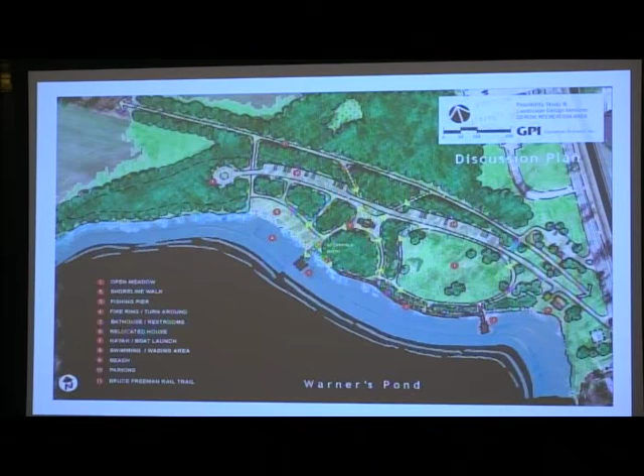Following the site walk, Ron Hedrick, who serves as our project manager and is also here this evening, showed a preliminary concept design illustrating how the park would build upon the current existing site features as well as handle some of the constraints. The majority of attendees provided comments and thoughts regarding programming, site amenities they'd like to see, and other questions related to the overall property.

So this evening we have our consultants from Greenman-Pedersen, GPI, who is the town's chosen engineering, design, and planning firm, with us to provide an update and show some updated designs that build off of this, but also build in some of the comments we received from the first meeting. I'd like the opportunity to reintroduce you to Ron Hedrick, our project manager, and Bonnie Ewing, the landscape designer, and Kristen Sabaski, the environmental sub-consultant from the ESS group, who is currently working with the town through the Natural Resources Division on the Warner's Pond assessment and dredging feasibility, but also is a sub-consultant of GPI for this particular project. I'd like to welcome Ron up to go over some new developments.

Well, good evening, everyone. Hopefully, if it's not a spoiler alert, maybe somebody will give us Red Sox updates throughout the evening. I know where they were when I looked last. I'm going to try to keep my presentation to about 15 or 20 minutes.

I've got about 30 slides to get through. But the first thing we want to start with is a little video clip we took. We had our drone pilot go out and fly a quick perspective from the water looking back. I thought it'd be an interesting thing for folks to see. If you were at the site walk, you know there's a lot of trees out there, different areas along the parcel. I'll get into that a little bit, how there's sort of segments that are different in character, but I wanted you to see it from the water and highlight some of the different areas. So if you could roll that, Kate.

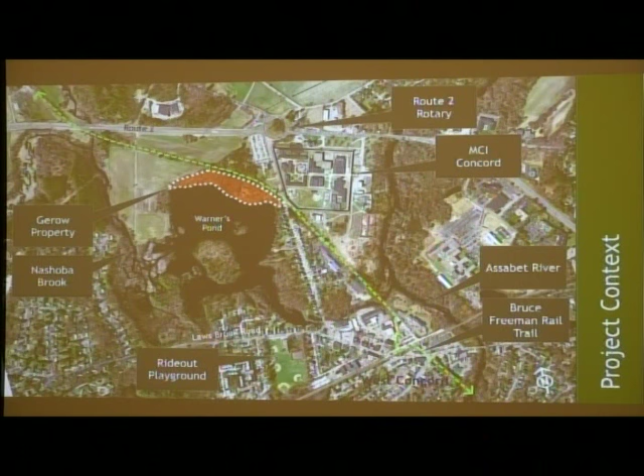The site is about 0.6 miles from downtown West Concord, probably about a 12-minute walk along the rail trail. So it's going to be a great asset that everybody can walk or bike to from West Concord, or certainly visit from other parts of town.

Here's an aerial of the site. You see there's not a lot going on there currently. We've got the one residential house, the old Gerow house. There's a driveway that comes in from Commonwealth here, just under halfway into the site.

Probably some of that is simply removing some of that vegetation layer, maybe mowing it like what happens in the lawn section. The second area is the house lot, which is predominantly a mown lawn. It's fairly nice in that the understory is kept down. The trees around the house are nice. There's a few ornamentals there, like a Japanese maple, and an arborvitae hedge that kind of screens the driveway off from the house.

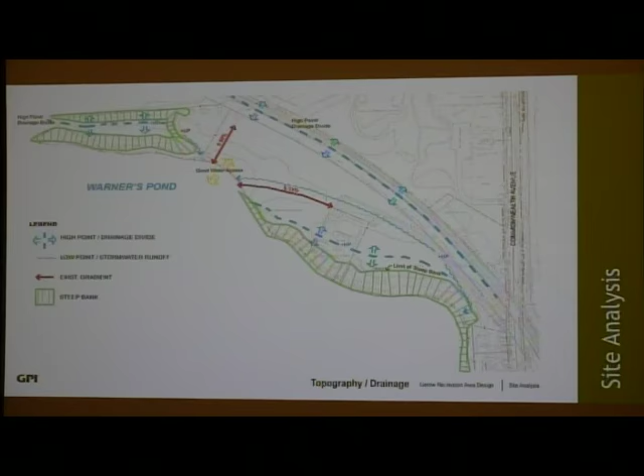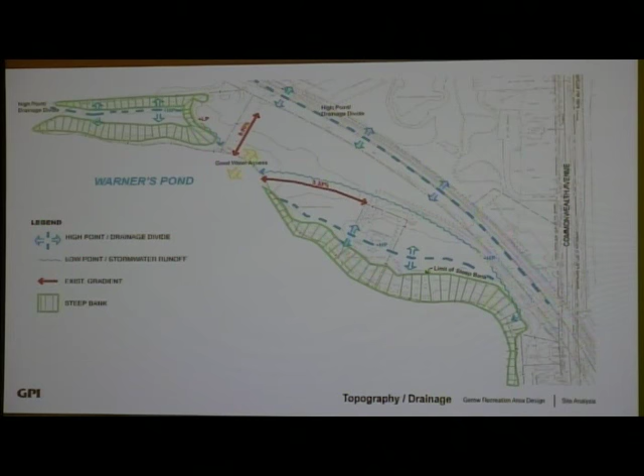And then finally, this red arrow here is showing the existing slope, which is important. The gradient of the ground there, in terms of accessibility, suggests where we might be able to get accessible connections down to the water, which is obviously an important part of a public project. Just as a comparison, you can see right here 8%, which is at the very maximum of accessible grades, whereas this is about 3.3.

So it suggests there's a very natural line down through here that we could put a path and meet accessibility. So those are three key things that have come out of an analysis of the topography and of the drainage.

This one shows the existing driveway going in, and if you were at the site walk, if you go back into the woods, there are remnants of a road that was put through here, or at least the start of one. I think it was rough graded for a subdivision that never occurred, but nonetheless there's been some work done there that we could benefit from.

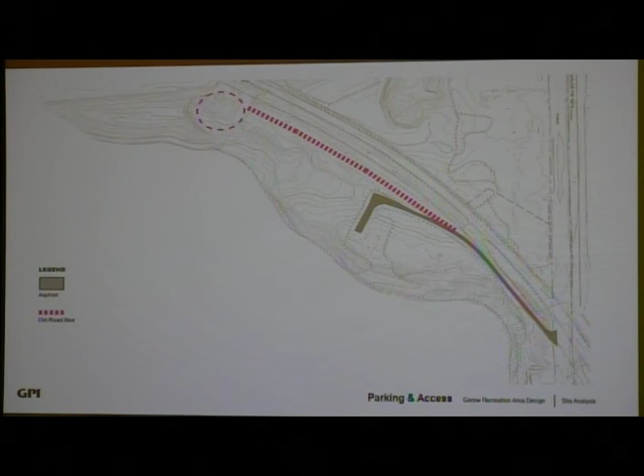You can see by the density of the contours this is a gravel pit area. A lot of this project site is very sandy, so at some point it either appealed to the railroad or someone else, and some sand was taken out of here and probably sold or used to construct the railroad.

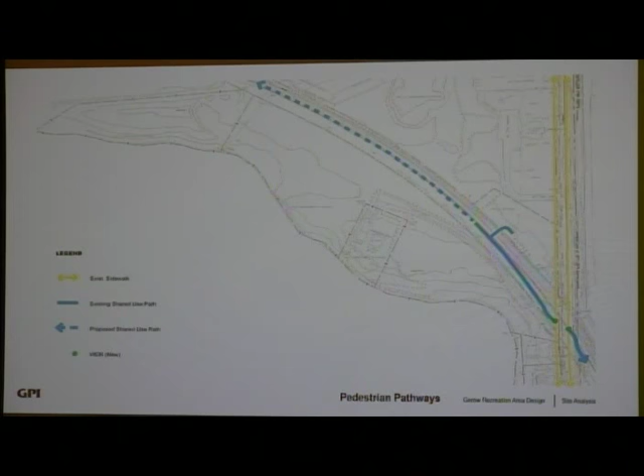This one shows the Bruce Freeman Rail Trail in blue. The solid line is the part that's been built under Phase 2C. 2B is in the works, shown as the dashed line. We've got this new pedestrian crossing here with wheelchair ramps, all being put in to meet accessible standards. We've got sidewalks along Commonwealth, but beyond that there's no real pedestrian facilities within the site.

This one shows the resource areas along the pond. To date we haven't found any vegetated wetlands per se within the site, but there are other resource areas under the Wetlands Act that we have to respect, including land underwater, anything underneath the body of the pond, and what's called bank.

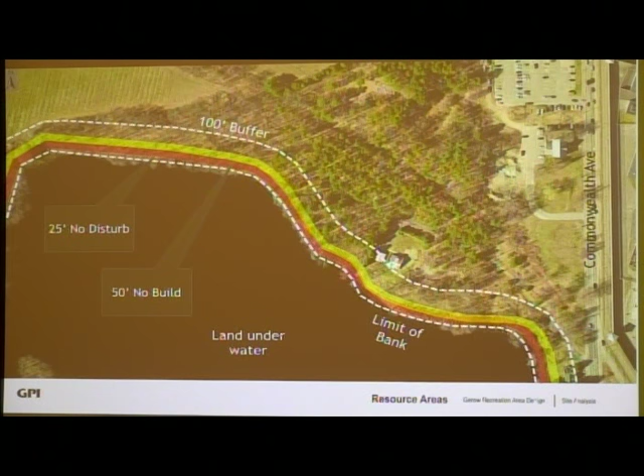So we've outlined what we think is the limit of bank along the pond here. The wetlands regulations apply a 100-foot buffer to that, so any work within 100 feet of that bank will have to be reviewed. But there's also a local bylaw for a 25-foot no-disturb zone and a 50-foot no-build zone that the town applies here. So those things, in conjunction with the steep slopes, restrict what we can or cannot do along the shoreline of the pond.

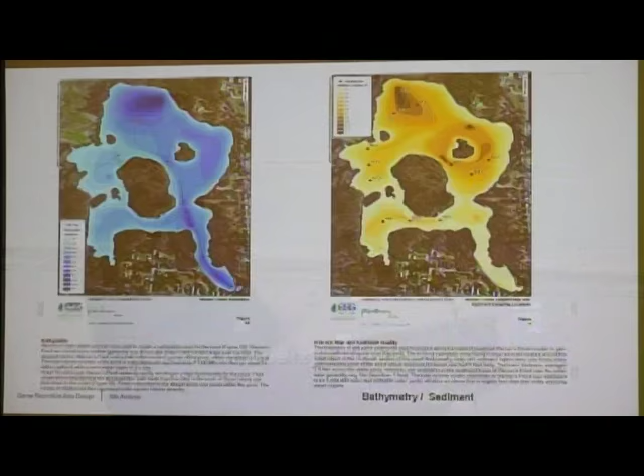A couple of maps that ESS had prepared for their watershed management study. The one in blue on the left is a bathymetry map showing the depth of the water. The one on the right is an isopach diagram showing sediment depth. The darker the colors, the deeper they are.

This here is the deepest area currently within the pond, getting to about 8 or 9 feet, if I remember correctly. Correspondingly, you can see over here, in a similar location, some of the deepest sediments.

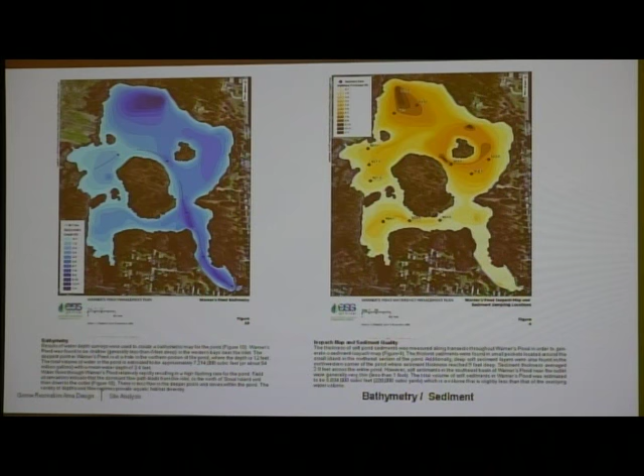One of the things we've come to realize is there's an existing outfall pipe that comes from the other side of Route 2, from some of the agricultural fields, that discharges into the pond. We believe this deep area is a result of the scour caused by that discharge, which keeps flushing the area out, and that the depth of sediment next to it is from that same action. This is what Kristen's firm has been working on, addressing the overall health of the pond, which involves sediments coming in with Nashoba Brook and basically filling the pond.

Just a collection of some images. There's lots of great pictures out here, great views. Some of them are stunning, like the big one on the lower left, looking from the house site out into the pond. Others are internal views, looking into the woods, looking out from the woods, looking along the driveway. These are all things we want to consider as we design this park, in some cases enhancing those views.

This one's a little hard to read, but it's a collection of the utilities that were out here. There's overhead power that comes in and serves the house. There are two drain lines that pass through the site: one coming off Commonwealth just clipping the corner of the project area, and the other one I mentioned that goes out to Route 2 and beyond.

I mentioned at the last site walk that we were looking at whether that line could be changed as part of the Bruce Freeman project, which my firm is also working on. But it was concluded that the line is so deep it wouldn't be effective to try to daylight it or do something with it within the park. It would just be too much disruption. So it was decided that work would probably be handled in a later project as part of the Route 2 Rotary project, which is down the line. It seemed like a more natural thing to do since it's a state-owned drain line.

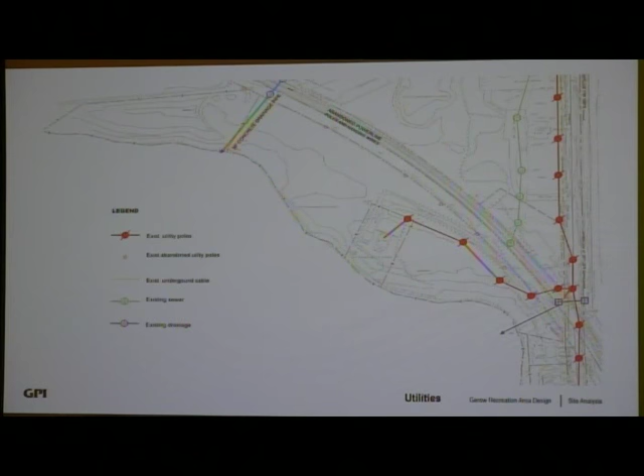There is no sewer on site. The house is currently on septic, and I think it's on well water, but water would be a consideration we'll have. There was an old line of sewer lines, but these were all for the houses that used to be along Commonwealth, most of which have been removed, and presumably the sewer is now gone.

So we broke the project into 5 major components, broad headings that we use to consolidate things, put them in folders if you will. And everything kind of lays under these.

The 5 include environment - obviously we've got this beautiful site next to the pond, it's a sensitive site, but there's environmental, both aesthetic issues as well as functional issues of the environment there. We've got the planned activities we'll be putting into the park. We've got circulation, including vehicle and pedestrian. We've got structures to deal with, including the existing house that's there, as well as proposed structures that would probably include a restroom facility, maybe some shelters or pavilions. We're talking about potentially some fishing piers and/or boardwalks along the shoreline, and then the infrastructure - the electric, the water, the sewer.

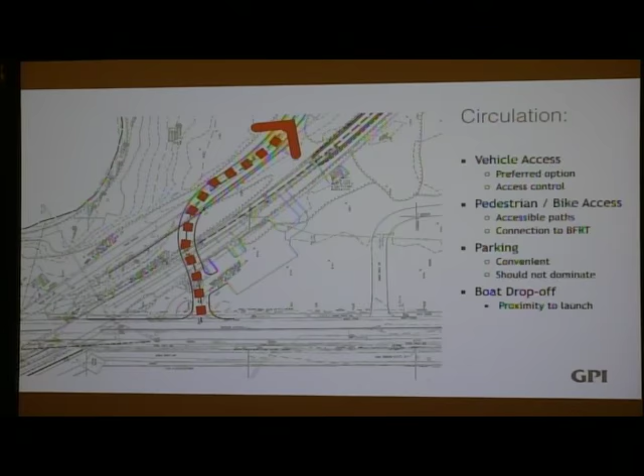One of the recognitions is the Bruce Freeman corridor is still owned by the state. The town has a 99-year lease on it, so we'll need an easement to get across the Bruce Freeman Trail to get into the park. That will probably be tied to the 99-year lease, so the stipulations of any affordable housing will want to be on a similar timeline, I would think, to ensure the park doesn't potentially lose frontage if, say, in 30 years the state suddenly says they want their rail corridor back, which is very unlikely.

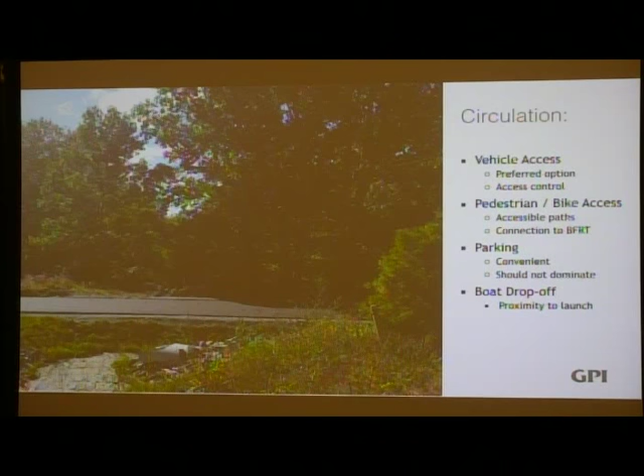This is just a picture showing about where that would cross. There was a detention basin area put in here as part of the parking lot, which we would need to modify to accommodate the new driveway alignment. But we feel that location is far superior to where the existing driveway comes out, it's got better sight lines, the alignment would be better, and it's much further away from the trail.

Here's a shot in the woods. As I mentioned, it's hard to get great pictures once you go into the woods with a camera. But you can kind of see the bump in the ground right here, and this is that old road alignment, and that little clearing is where the driveway ends. So the thought is to use that leveled spot as our access road getting into the park.

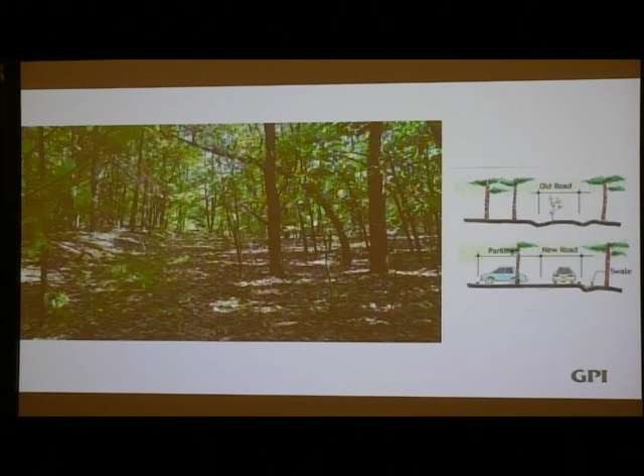We want to be able to get people in and distribute them into the park so they have access to the different offerings. These little sketches show a crowned roadbed with swales on either side, and the thought would be we'd add the road in there but have parking off to the left hand side, leaving the right swale to handle runoff from our new roadway. So it's using something that was built years ago and building up on it, which hopefully will minimize some of the disturbances, because as you can see there's still not a lot of trees growing in that, which might suggest that when they put it in, it was a gravel base or something that wasn't friendly to trees.

Structures is another major component. I think the current thinking is the existing house will probably be demolished through a green recycling effort similar to what was done, I think, at Rideout Playground. So a large percentage of that house would be recycled. It's just impractical to try to use it where it is for public functions, and to move it. Some estimates were done, and it's really cost prohibitive to move it, and hard to consider it affordable when it would cost so much to move.

The town is considering a restroom facility for the park, based on a similar footprint to the visitor center restroom. I think the styling would be more rustic to fit the park setting, but that's the current thinking. It would have male, female, and storage rooms, as well as a family room.

And then this is kind of that picture of a low-key boardwalk that we're thinking about as a shoreline walkway.

Why are we thinking of that? As I showed in the beginning, so much of the shoreline through here is so steep and inaccessible, and one of the things the town first asked about was how can we prevent erosion. So it's taking the site's worst feature and trying to solve it right up front.

So the thought was, if we could do a boardwalk along the waterfront here, wouldn't that be great to give us access? This is that point I talked about at the beginning of the Cove, where we can get accessible walkways down to that.

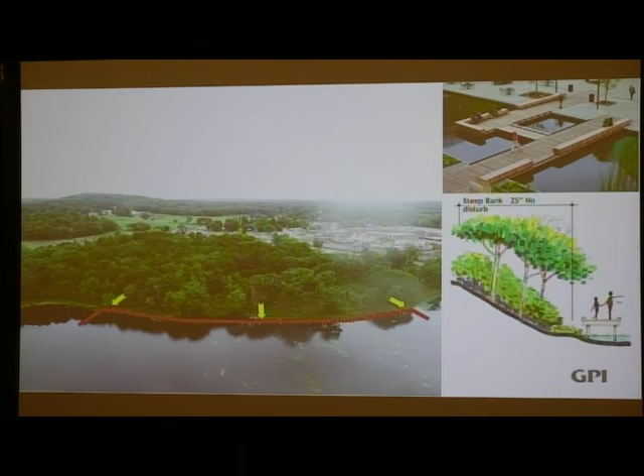So you can have access here to the water that meets accessibility codes. You'd have all this waterfront open to view the water, fish, boat, and so forth. And then these would be stair connections back up to the open space area.

A couple pictures on the right show that we want to minimize our disturbance of that bank, and treat up front how people are going to get down to the waterfront. If we give them ways and something to do, we're not going to get a lot of foot trails down to the water.

This is just a picture showing one of lots of different ways you could treat boardwalks. I kind of like this one for the benches, that we could picture benches being part of the design where you could sit, with sort of informal rails. Rails will be one of those things debated as to whether they're necessary, and that will somewhat depend on how high off the water it sits. But that's the thinking on that.

And then the utilities, as I mentioned, hopefully we can put the electric underground. We would have water, some minimal lighting for security, and stormwater—probably some stormwater basins in places to treat stormwater. We'll be doing low impact design as much as we can.

And we don't have sewer really available to us. It's like 700 feet out to the road, which makes it pretty infeasible to do a gravity sewer. So what we've been discussing are these compostable systems—a couple pictures here—they look like a regular bathroom, but underneath the unit are these compost chambers, which are kind of proprietary systems.

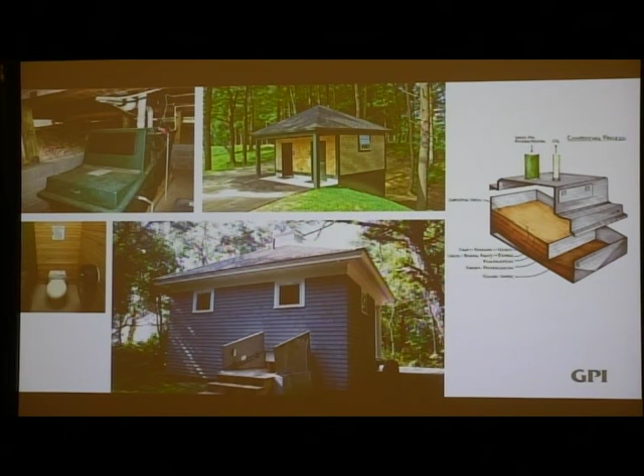It basically composts the system, and it's waterless—getting the water out is part of how it all works. I'm not an expert on it, but I read their literature. So that's kind of the thinking in terms of the restroom. That way it would prevent all the work necessary to put in a sewer system or septic field.

And then finally we get to the conceptual options. I'm going to run through 2 options real quick. The interesting thing is we looked at how we could mix things up, but because of all these constraints I've gone through, it really dictates the way a lot of the site wants to work. So we end up with 2 options: one's a full build, kind of where we started, and one is a reduced version of that. One of the things we discussed at the last meeting was, could there be more of the park left undisturbed? So I'm going to show those 2 and see which one you might prefer.

So here's the site. The green is the Bruce Freeman Trail, and that would be its route. The white is the property border, to give you a sense of where everything is.

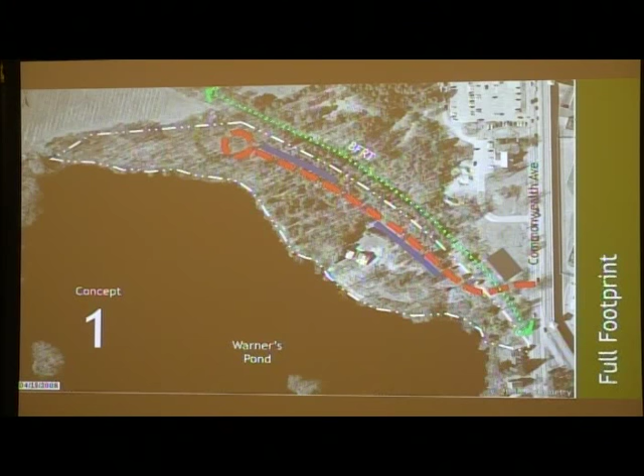This is the access road we've talked about bringing in with the new alignment coming off Commonwealth. It would go back just short of the gravel or sand pit area, which is a real disturbed area, where we'd have a turnaround so cars coming in could get back out. You don't want a dead-end situation where people figure out how to park and turn around, because invariably they end up pulling into the woods. This would have parking distributed along it.

Then there are these main elements. The orange is like the restrooms. This would be the playground, about where the house site is. This would be the shoreline walkway with a fishing pier and accessible boat launch. And this would be the beach area where the Cove is located, where you'd be launching boats.

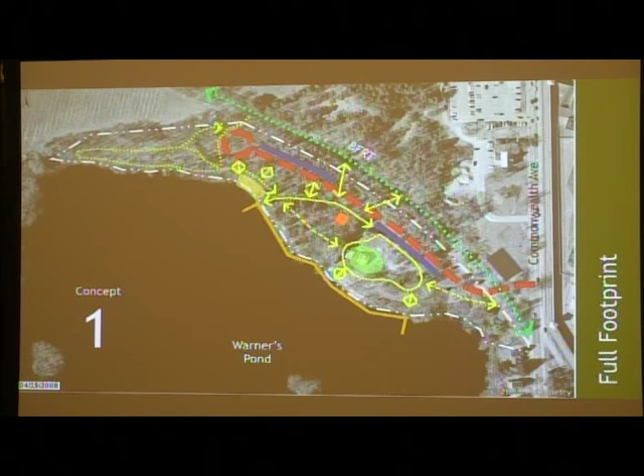You'd have a central core of pathways tying it all together. The solid lines would be predominantly accessible walkways, utilizing the natural topography to get from parking to the restroom and down to the waterfront, like a loop around the open space. And then you'd have more natural path systems in the back.

And what that all kind of looks like in a colored rendering is this, with the keyed in pieces highlighting all that. We've got some paper copies, and I can certainly go back to this.

The second option is—that was the full footprint, this is what I call the reduced footprint. It's not very glamorous, but it's essentially what it is. It starts with the road being shortened; instead of going all the way back, we pull up here, so we're disturbing less of the forest area. The parking is then distributed as such, and we're reducing the amount of parking in this scheme, going from about 50 to about 34 spaces.

Again, you'd have your central core facilities—restroom, boardwalk, playground, beach area. For the core pathways, by moving this back we still have reasonable access down to drop off a kayak or canoe and get it to the beach area. What it does do is expand the walking path part, the undisturbed portion, so from about here out would be left more the way it is.

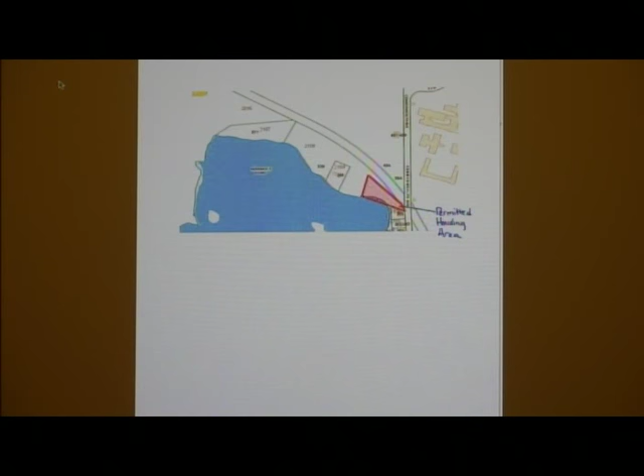Part of the plan we discussed with GPI is essentially ensuring that if we were to put a house here, it would be situated outside of the 25 and 50-foot buffer zones, and that it wouldn't look like it was crammed in just up against Commonwealth Ave, but would look like it has some type of backyard area. If you superimpose this image on top of either concept A or B presented tonight, you'll see that does just that. So that was sort of the limits of what we did as part of this plan, the development.

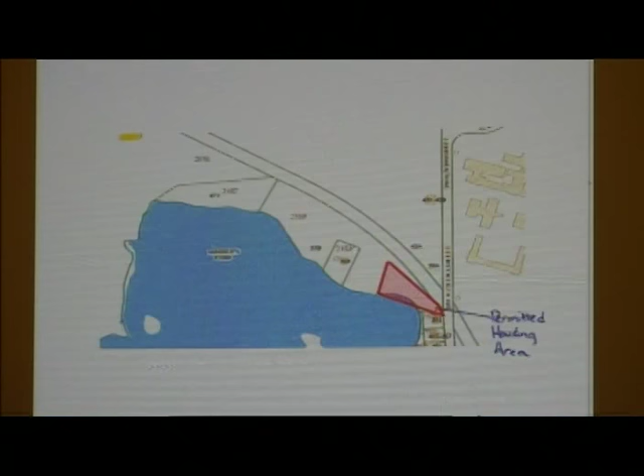My understanding is that the Affordable Housing Committee, which I believe you're a part of, and the other housing groups in town would be responsible for perhaps putting in a CPC article or some other type of funding article in order to develop this. But that is not part of our plan. We plan on keeping this area. The only thing we're doing there is hopefully getting rid of some of the invasives.

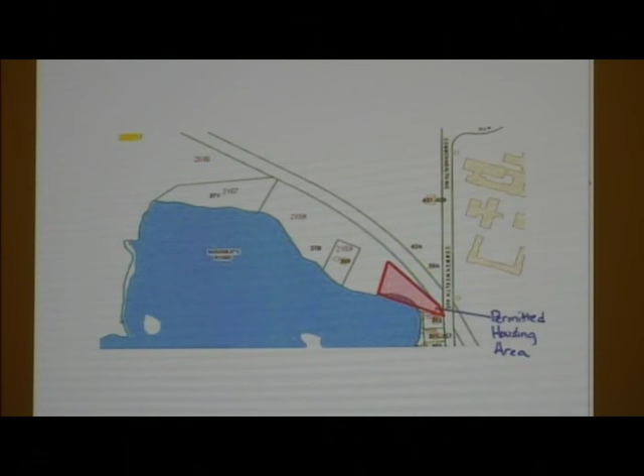Well, if you think the housing groups have been told about this, that's not right. We have not been told about that role, and we have not been a part of this discussion. And we had a big part in the passage of the warrant article at town meeting.

I understand that there's some, and your consultant quoted the fact, it looks like the best thing to do here is demolish. Early in the process, we at the Concord Housing Foundation let it be known that we would try to raise $100,000 to fix up the house. And I doubt that that's been used in the equation between tearing it down and moving it.

I think the housing groups, and I speak for myself on this, were very frustrated that we had this as part of the warrant article. There's been nothing done by the town in your study, and we have not been involved. That's not true. Oh, it hasn't. Who's been involved?

Well, I'd like not to get into a debate with you about this. I'm happy to meet with you offline. No, I will not do that alone with you. You don't need to. We've had several meetings where several members of different housing groups have been associated. I also have copies of 4 separate emails that were sent to which you were a recipient.

I'd like to call up perhaps Tom McKean, who can talk to you about that, because this has been discussed at more than one select board meeting at a public forum. I'd also like to call up Ryan Orr, our facilities director, who did the estimating along with Elizabeth Rust, who works for the Housing Foundation. We have an estimate, which we also discussed at an open meeting. So maybe Tom can come up first, and then Ryan.

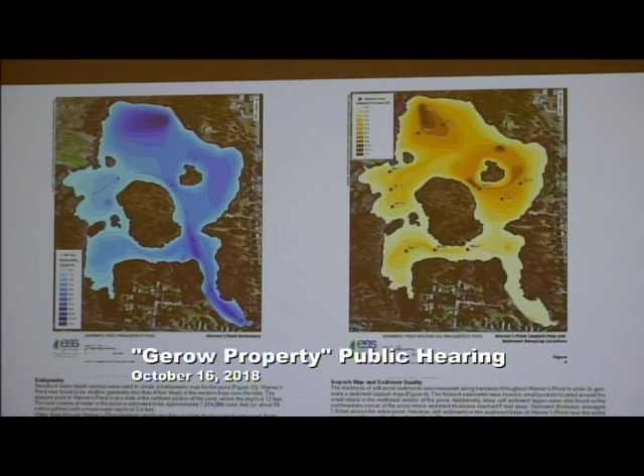Oh yeah, so the area that's colored in is the entire pond. This is Scout Island, and the Boy Scouts own that island. There's kind of a big wetland area that leads in over on this side, and then the outlet is down this way.

Hello. Hi, Dee Ortner, 169 Thoreau Street. I have a few questions. The first one is, can you tell me what you anticipate the capacity of this site, this recreational site, is?

I think the capacity is one of the things we're trying to get at, like in terms of parking, you mean, or in terms of people who would be at the site on a Saturday afternoon, a hot Saturday afternoon?

Yeah, that's, I think it's a difficult number to arrive at. It's like predicting how many people are going to show up before you build something. But the schemes are, we've estimated, like the Fuller one is 50 cars. So there's 50 cars that people could come in, whether it's one person or four. And then there's the bike paths, so there's any number of people that can get there via bike path.

I think you're talking anywhere from, on a quiet day, 20 to 30 people, to maybe several hundred during the peak seasons. Is there any other park that you can compare this to? What about the other one in West Concord, Rideout? Can you describe what the capacity is there, what the number of people who are typically there, how would that...

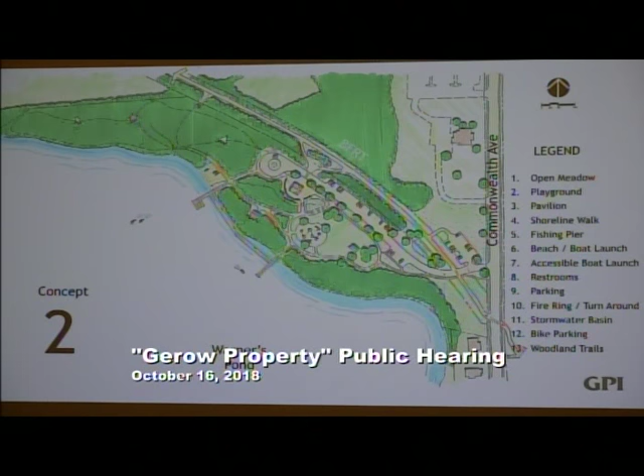I think we're going to raise enough money to get into the park, have some small parking facility, and do some improvements that the community will think is major, that aren't terribly expensive to utilize. If we don't get all the funding we need in the first year, we can generate interest in the park, raising money for one thing, then another. But getting into the park, parking, and having some actual usage would be priority number one.

So then you still have to have the people there who are the maintenance people. I guess I'm wondering, instead of looking at concept 2, if you looked at concept 1 - could you go to the concept 1 slide, please? I wonder what you could do if you took a 3-year or 5-year approach to the build-out of this. Could you describe how that would occur?

Sure. The thought would be to make the simple connections, maybe not as many, but a couple from the Bruce Freeman Rail Trail onto the property, to have the drive-in with some parking, to clear out the invasive species and do some tree canopy trimming so the area that's more robust with trees is able to be preserved.

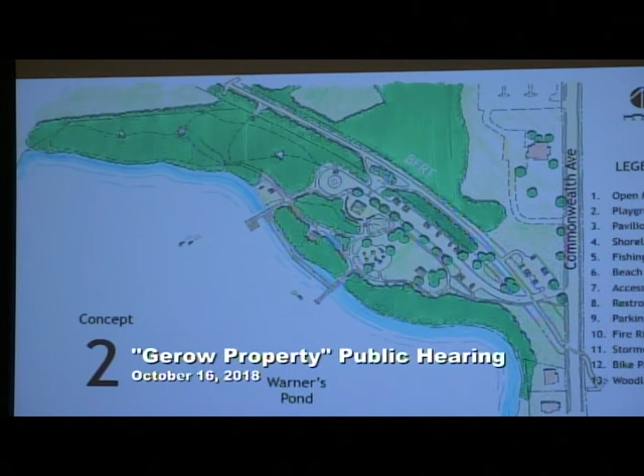Just asking a question of you - Erin, would you mind going back to Concept 1? Would you take Concept 1's boardwalk, wherever that may be, and superimpose that on Concept 2's parking and paved plan? Is that what would become 2B? If you go back to Concept 2, it has almost the identical boardwalk there, you just only have half of it. So I would extend the boardwalk further down and have a path. Concept 2's boardwalk is about half as much as Concept 1 - it comes out to right about where Ron is pointing, that red mark. So I would extend it down to there and have a cut through, on the master plan. That's great, exactly at half - I cut it exactly at half for this.

So this by no means is the final plan. I think what we are going to try to do is take the feedback from this evening, coupled with the feedback we got from the first meeting, and then we're also going to be doing an online series. We're lucky that Minuteman Media Network was taping us live tonight, and hopefully we'll play it a couple other times so folks who couldn't come out can take a look, and we'll try to have a couple of online polls. We'll make sure to communicate that to West Concord Advisory Board, the Select Board, CPC, and all other interested parties, including the housing folks.

I agree with you - we can try to superimpose a place where the house could go. I think that would be helpful to understand, and maybe a connection to the driveway so you can see how it's oriented. As far as preparing the site and invasives, we absolutely are planning on doing that as part of one of the earlier phases, for a dual purpose - one, to have the site ready, but two, to make sure access is open, accessible, and also visible for emergency services. That was a very good suggestion and I think would be helpful.